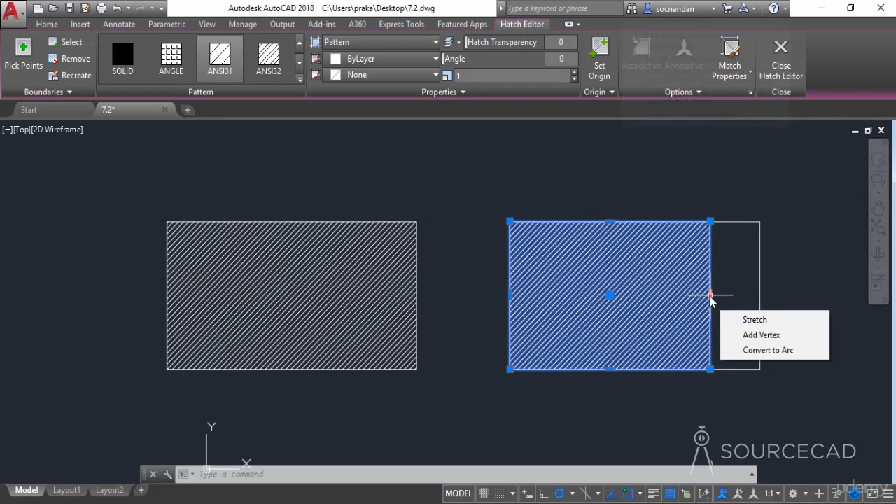In this case, you have additional boundaries along with the hatch. So now here we have the boundaries, and you can use these boundaries to move the hatch pattern like this. Now let's press Ctrl+Z to get back to the original rectangles, and now we'll learn about the origin option.

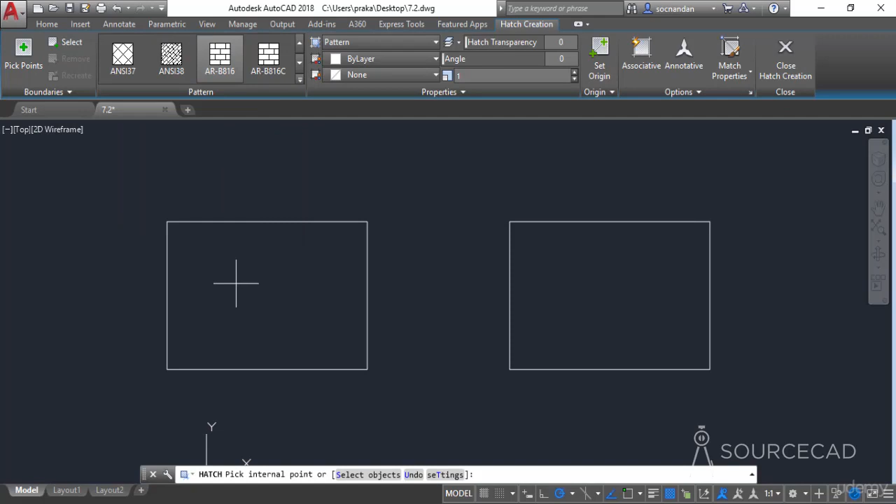So let's select this hatch pattern, and this time I'll select a different pattern. Let's select this AR-B816 pattern and now click in this area. Now the hatch pattern scale is quite big and we need to change it. We need to actually decrease its value in order to see it clearly. So I'll go to this scale and change its value to 0.1 and press enter. Okay, so that's the hatch pattern here.

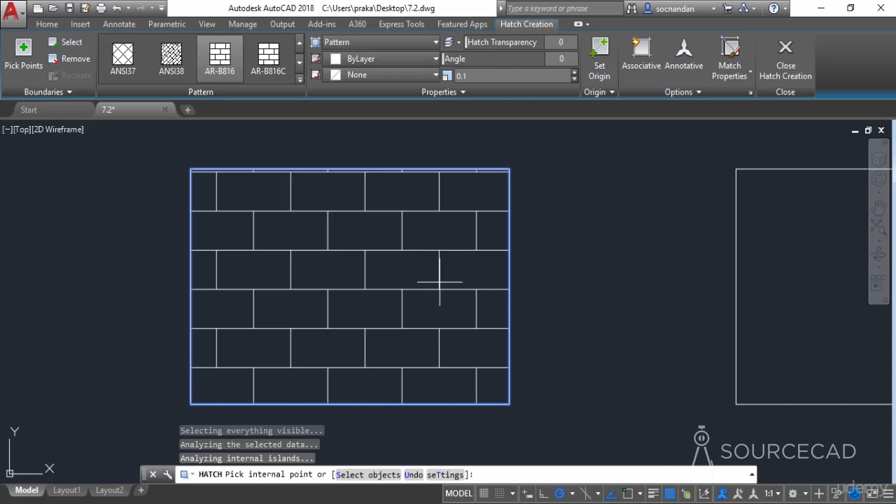Now look at the hatch pattern which is applied here. In this case, the pattern started from a random point and it's now following the rest of the geometry, but we don't have control over the full block size. Now let's say that we want a full block on this corner. We want the complete block to start from this side, and we want the rest of the block to follow that pattern.

For that case, you can specify an origin point. To do that, select this set origin option and click at a point where you want to specify the origin. In this case, it will be this point. Now click here and you'll notice a change here. Now on this side we have this complete block, and the rest of the blocks will follow this origin.

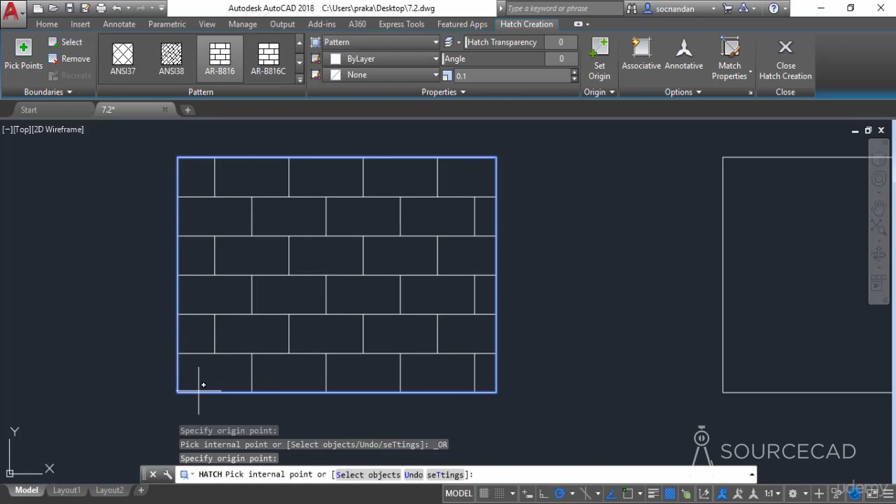Similarly, if you want to change the origin, you can select it here as well, or any other point. I'll go to set origin again and I'll click at this point. Now the origin changed to this point. So that's the set origin tool. You can use this tool on other patterns also.

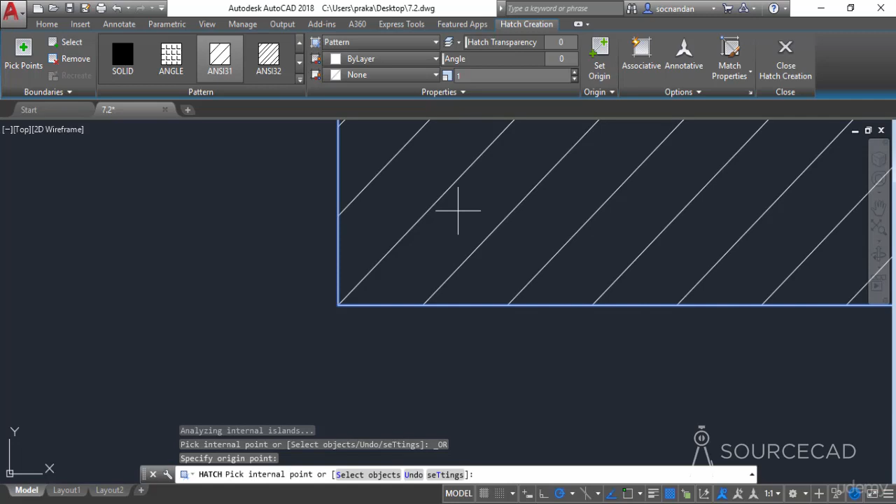For example, I'll select the same hatch tool. I'll select the ANSI31 pattern and change the scale to 1, and let's apply the hatch here. Now if you zoom into this area, you'll notice that the hatches are not starting from this vertex. What if you want the hatch to start from this vertex? Obviously you can change the origin. So go to set origin, click on the vertex, and the first hatch will start from this vertex, and the rest of the hatches will follow the pattern.

So in this way you can precisely change the pattern of hatches and specify the origins, and it will be very helpful in many cases. For example, if you want to make a tiled pattern somewhere on the wall, this can really help in deciding the side where you want the full tile to remain visible. So let's now click on this close hatch creation. And that was all about the set origin and associative option of hatches.